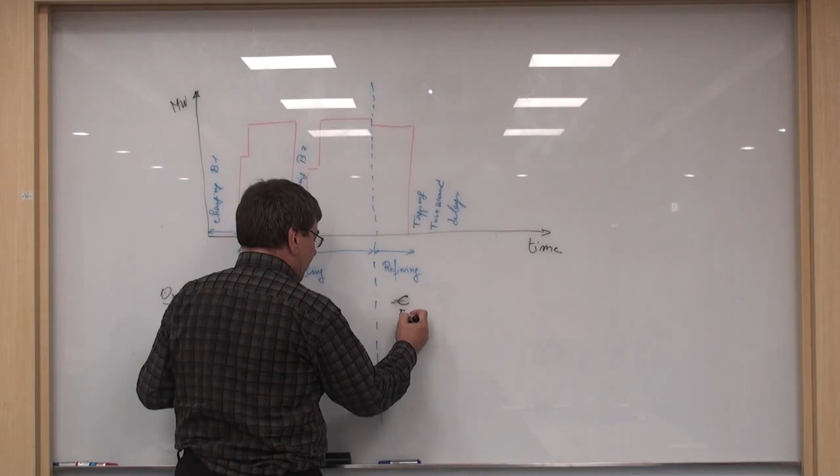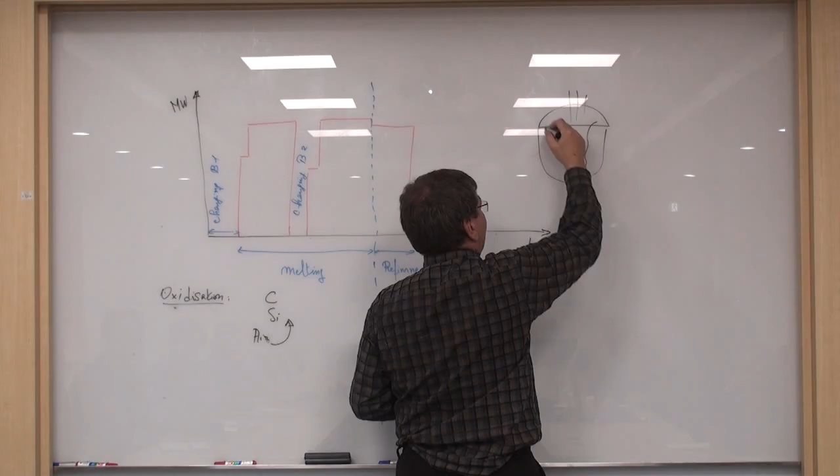The air here is considered to participate to the oxidization. Here, no air. It's easy to understand. During melting, you have scrap here around, so the air getting inside the furnace is participating to the oxidization, because the air meets the scrap.

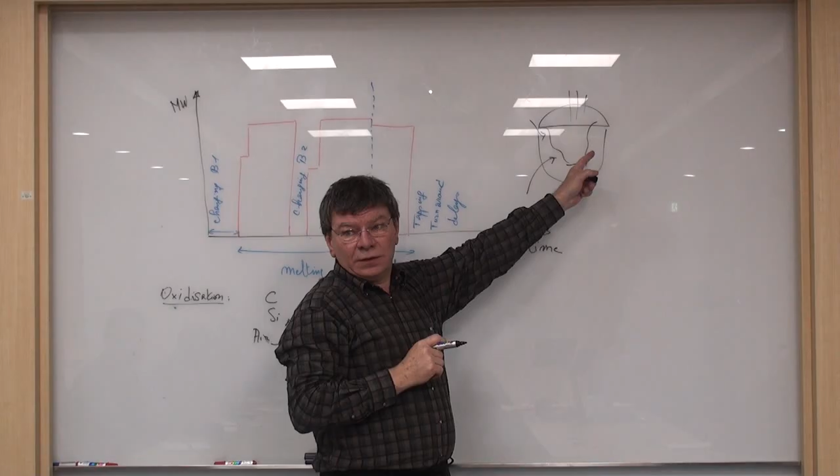During refining, the air, of course, is getting in, but just meets the CO, which is coming from the bath and making a reaction here inside. There is no participation of the air to the thermal balance of the steel. Except if you have too much air, and then you can cool down the bath. But this hypothesis I don't consider here in the thermal balance.

I'm doing this not to make a diagnostic of a furnace, but to design the best conditions for the furnace. Okay? So we do not consider the air intake during the refining time, and it is for the thermal balance, not for the off-gas. For the off-gas, it's considered to have the off-gas analysis and flow here.

So if we suck the gases from the EAF, and if we take out so much of the introduced gases from the EAF, then the atmosphere air is coming. Yeah? No?

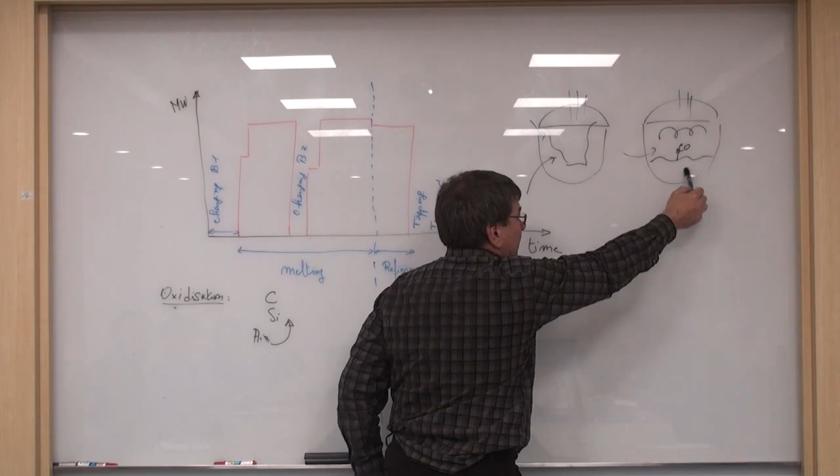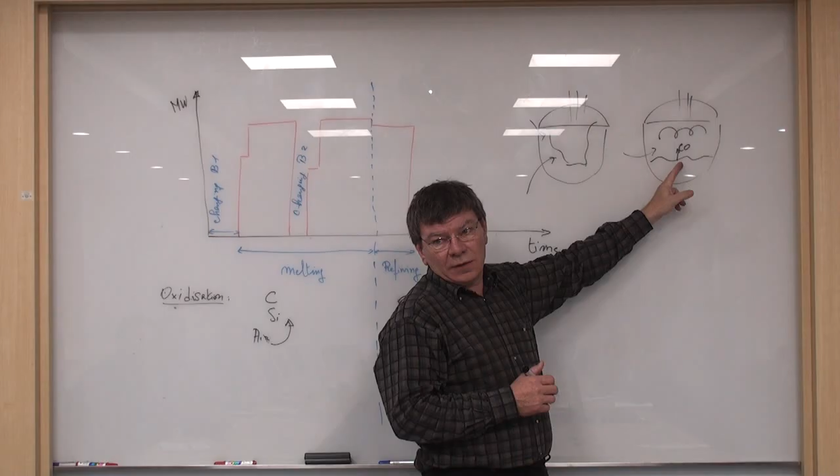Yeah, because the air will not participate directly, this is my hypothesis, to the decarburization. To a certain extent, it is wrong. Because if you increase the partial pressure of oxygen in the furnace atmosphere, of course it will contribute to the slag equilibrium. But for me, it's a very, very thin influence, which is not very important for the purpose of this kind of calculation.

How about the stainless? In case of stainless steel, the stainless steel EAF has bottom stirring. Not necessarily. No. Normally the EAF for stainless steel has porous plugs, 3 or 4 and so on. And when they do the bottom stirring during the refining times, they can meet atmosphere air. So you also do not consider it, because it's a small item and it's not easy to adapt?

This is a very special application. I just know Japan is using intense stirring for stainless steel. In Europe it's not used? No. And neither in the US. I made trials myself in a stainless steel furnace with porous plugs. And the result is that you increase the Cr2O3 of the slag.

Sure, too. You increase the chromium oxide in the slag. Yeah. And that's it. Okay. Especially during the flat bath. Yeah, because you increase the contact between the steel and the atmosphere. This is not useful, because there is no way to avoid having, let's say, air in the furnace atmosphere. Otherwise it takes measures to tighten the furnace so that you cannot work anymore.

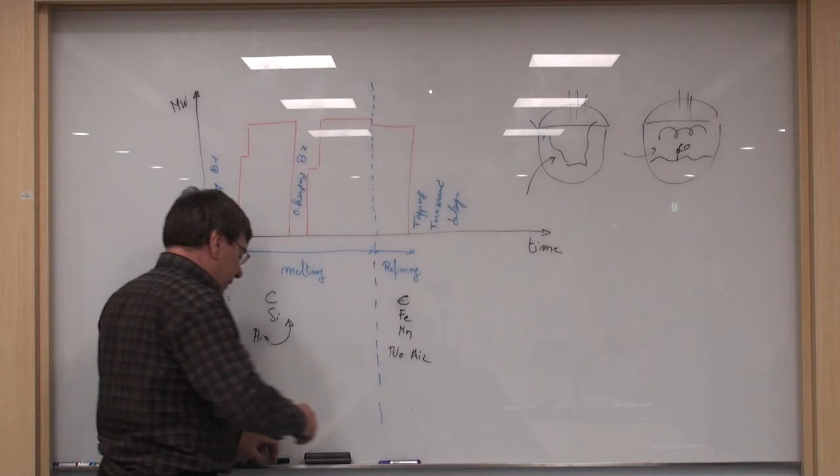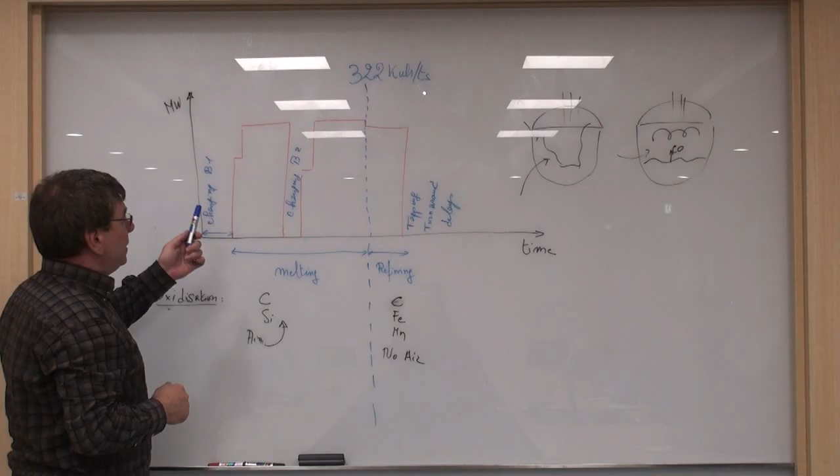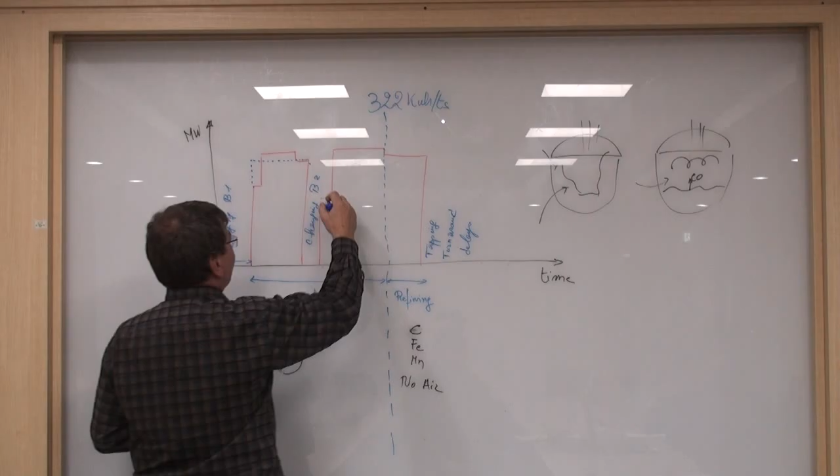Then the criteria here is 322 kilowatt-hours per ton of steel. For sure, in reality you may have a different melting pattern. For example, you reduce the voltage at the end of the melting phase of basket number 1. Here you have this kind of melting profile. In fact, the megawatts you see in my model is an average megawatt. Okay.

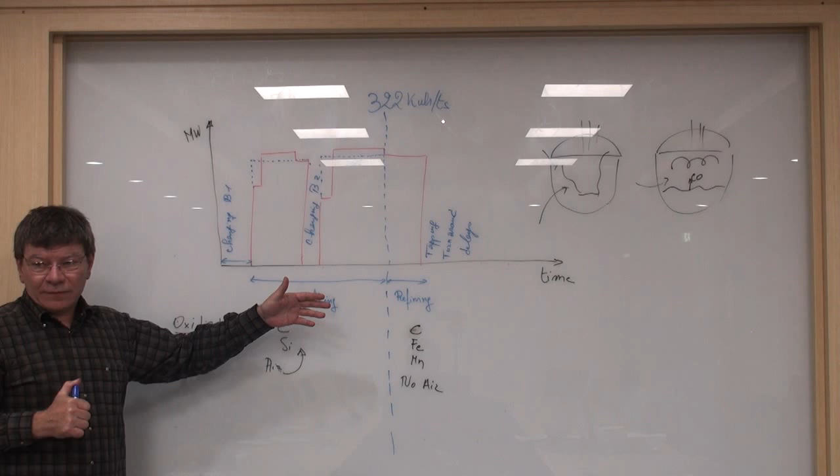Again, let's say we could implement this in the thermal model, but it complicates the model unnecessarily. For the furnace transformer, you just need to increase the capacity of the transformer by 10%, and that's it. Or 15%. Well, so maybe we can reconsider the carbon balance as well if you think it's necessary.

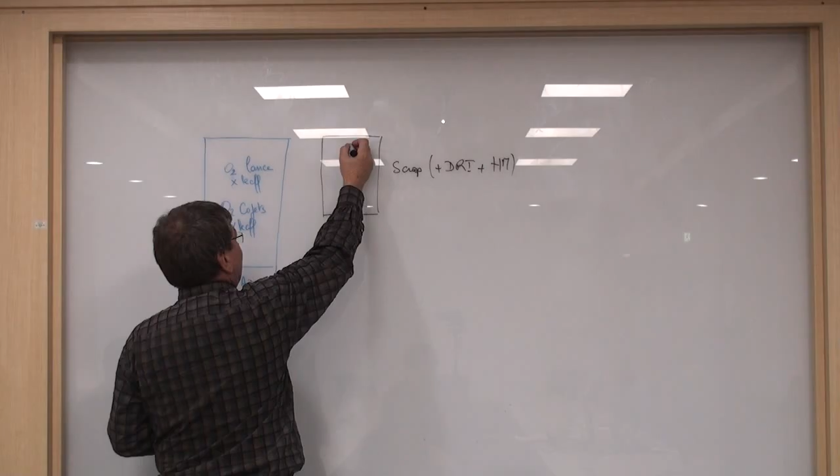On the other hand, I have what I have available in scrap. This is scrap plus DRI plus hot metal, but generally speaking, scrap. Inside the scrap, we have carbon, silicon, manganese, phosphorus to oxidize. This is given by the material balance. And then I have to inject carbon. This is given by the refining time and the flow rate I want to use in the furnace.

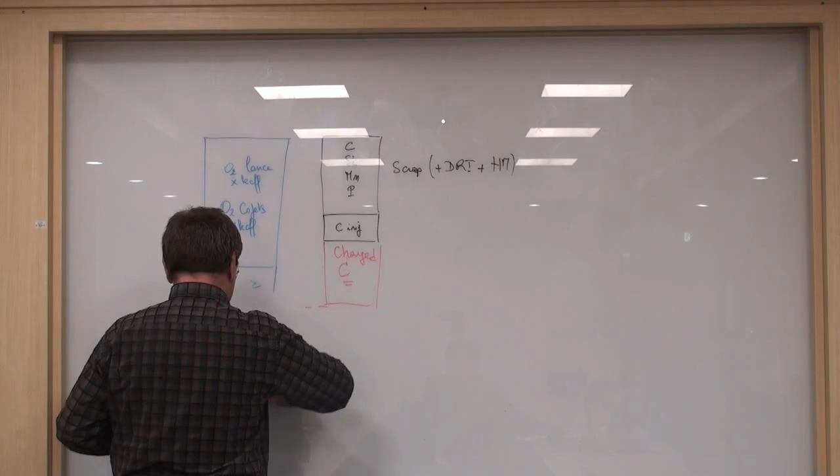And then comes here the calculated carbon, charged carbon, which is to compensate the total amount of oxygen. Is it clear to you? Yeah. Yes. So easy, yeah? It was more complicated in the formula, but this is just a translation of that. Okay. You have the picture. Other questions? No? Perfect.

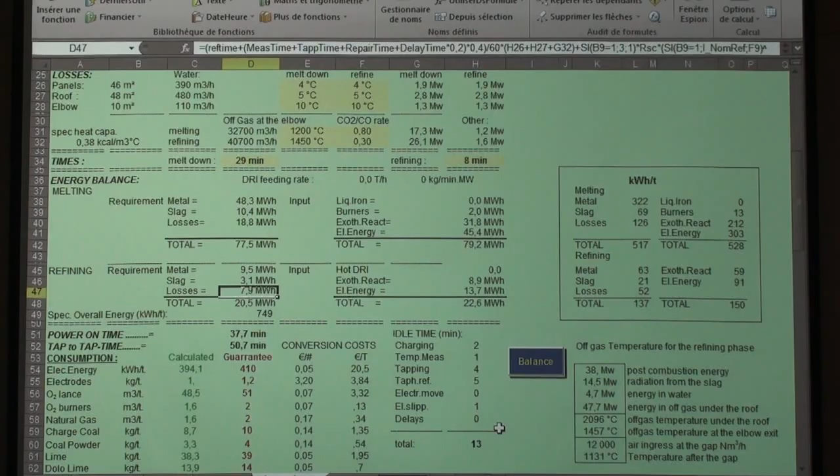Well, so if we come back again, when you have a project, the first thing is to know the tap weight. So you fill in the tap weight and the hot heel. For a conventional furnace, hot heel is about 10%. Some other companies said 15%. Too high? Look, there were so many studies about how much hot heel you have to keep in the furnace. What is sure is that if you increase the hot heel, you slow down the furnace.

The hot heel is necessary to have an aggressive power profile. Because if you don't have hot heel, for example, you bore down and, as the electrodes are in the scrap and the roof is protected, you go full power. But then you go down to the bottom, and if there is no hot heel on the bottom, you dig out the refractory. So the hot heel is there to maintain a certain buffer to absorb the energy of the high power furnace.

If you extend the hot heel too much, of course you extend the surface, so you increase the radiation of the hot heel during tapping, and then you have to put more energy in to reheat the hot heel. But as I heard, if we increase the molten steel, we can save electric energy because the hot heel can help melt the scrap. And make only the bed. Yeah? Hot heel is necessary, definitely, but not too much.

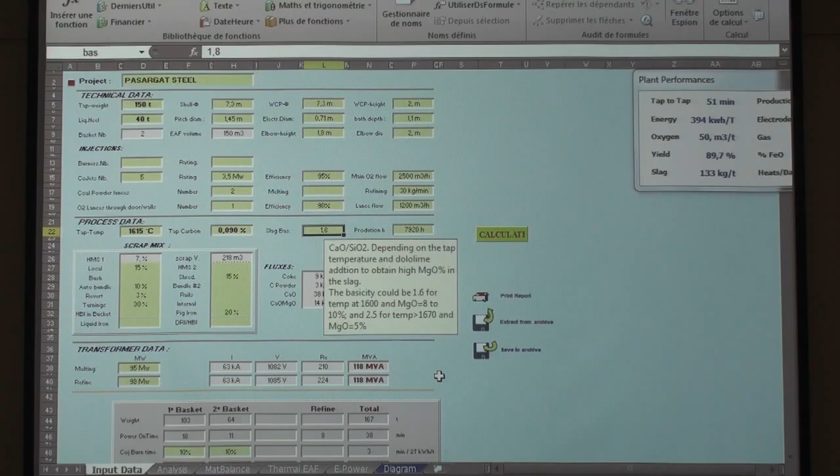You have this small comment. The slag basicity can be reduced for carbon steel, I mean construction steel, down to 1.6 if you are sure to tap below 1,600 and to have saturation of magnesia from 8 to 10% of the slag. And if you want to increase the tapping temperature for special applications, for example 1670, then you have to increase to 2.5, and MgO minimum 5%. The saturation in this case is in the range of 11.

For conventional furnaces, you are not sure about the homogeneity of the bath, so you have to increase the temperature a bit, because the temperature you measure in the door is not necessarily the same everywhere. And then afterward, it depends on the preheating of the ladle itself and the distance between the furnace and the ladle furnace.

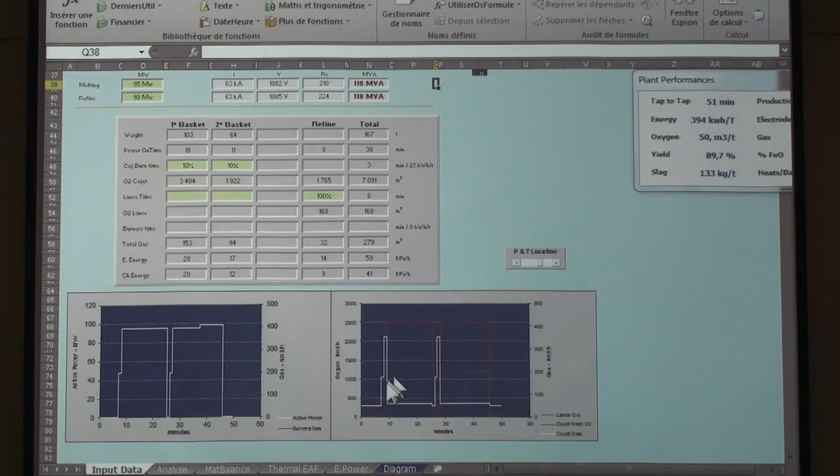Then you fix the... I will put you again this macro for the megawatt calculation. Yeah, and then you put the process you want here. For the burner time, I mean, it's not necessary. This is the time where the injectors are used as burners. So it's not necessarily a long time, because then the efficiency of the burner is decreasing very quickly. So you can switch to the oxygen injection quite fast.

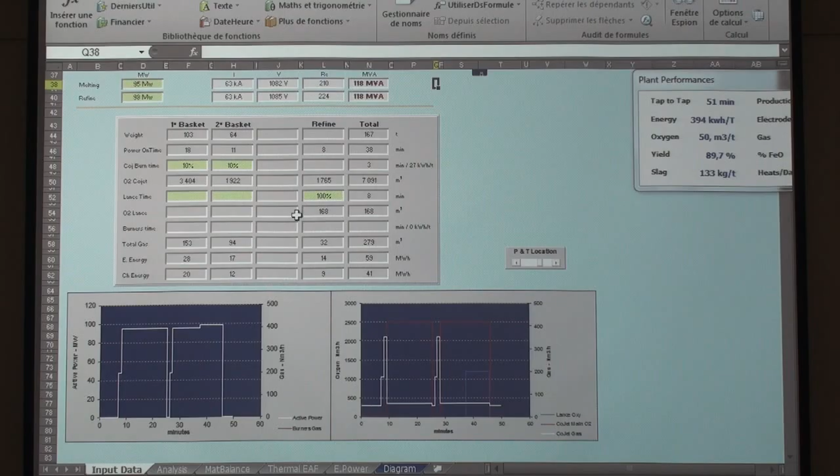And the door lance, I don't suggest to use it for melting phase, just for refining phase, because it's better to keep the door closed as long as possible to avoid too much air ingress. So this fixes the process profile.

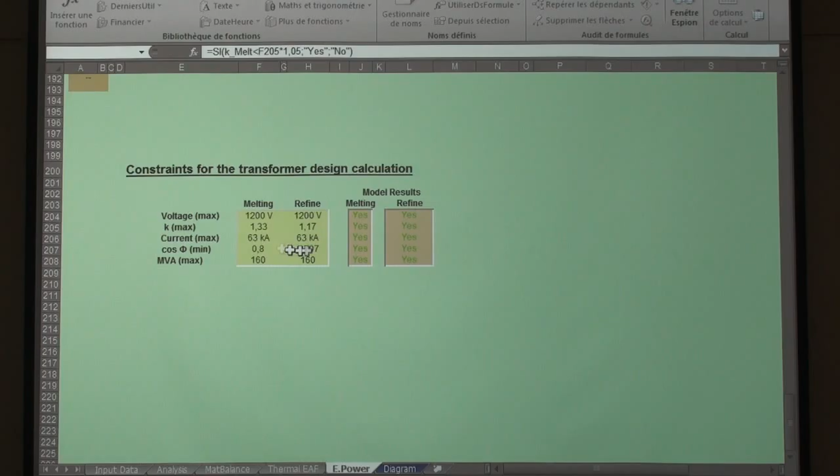Then you go to electrical power, you fill in the single line diagram, and then you adjust the MVA and the secondary voltage. You can adjust as well the current you need by this limitation here. This you don't need to touch. This you don't need to touch. This you don't need to touch, but the current we can adjust depending on what you need.

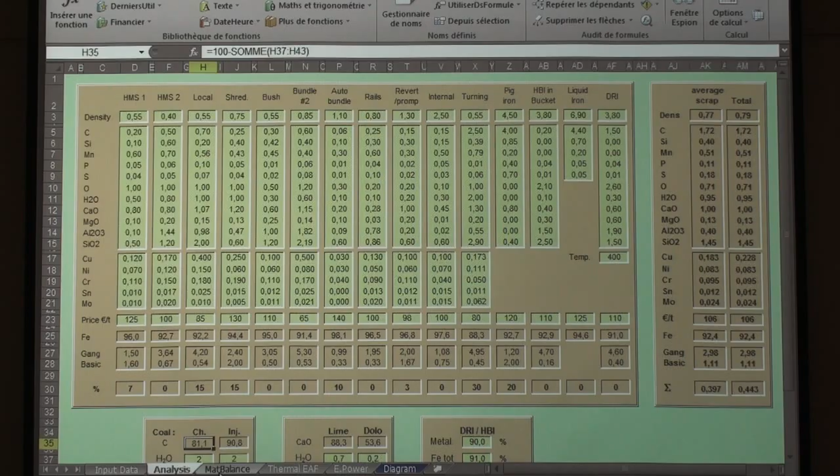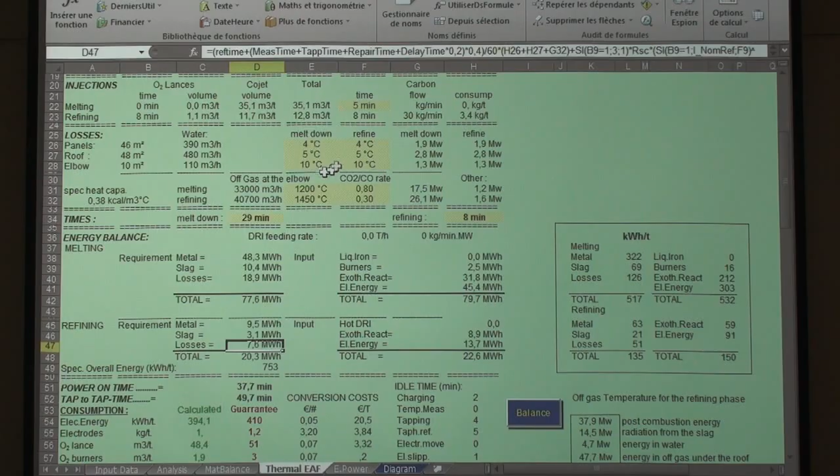Then you go to analysis. You adapt the analysis of the fluxes whenever it's necessary. Eventually, you adapt the scrap analysis depending on the situation. You check the material balance. You adjust the iron content and the magnesia you need. And then thermal balance. You adjust the water delta T and off-gas temperature. You balance and you check here; this is the Sankey diagram.

Yeah, where you have the liquid steel enthalpy, the energy of the slag. This is the energy absorbed by the water, I mean the water in the scrap. I've put this here, but it could be included in the off-gas itself. This is the water-cooled panels. So the slag usually is in the range of 60 to 80 kilowatt hours per ton.

Slag 60 to 80. Yeah, depending on the scrap cleanliness. Water-cooled panels, it's in a range of 35 to 40 for good furnaces. 35, 40. This is the water-cooled panels here.

Off-gas is in a range of 120 to 150 kilowatt hours per ton, depending on how much fossil energy you put, because fossil energy will create a lot of CO. So if you have a lot of CO, you increase the off-gas energy. FeO, this is eventually the reduction energy for the DRI. So it depends on the DRI.

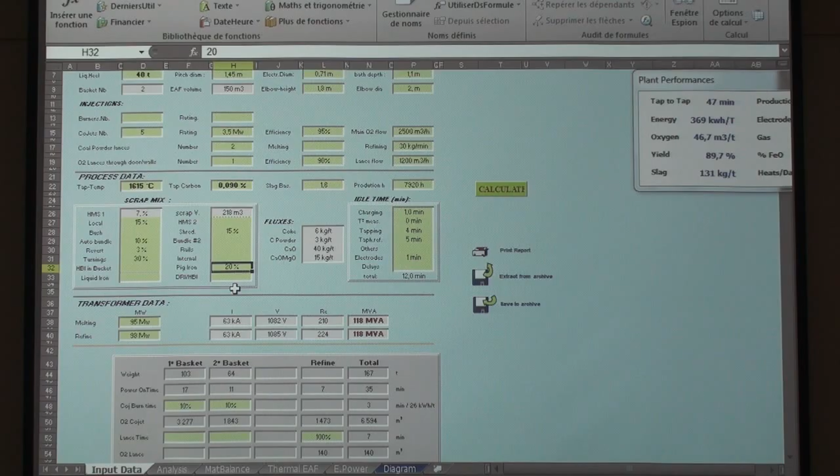And this is the ohm losses. Electric ohm losses, yeah? You remember the resistance in short circuit, times current squared, and so on. So this is the requirement of energy, this is the sources of energy. So liquid iron, if you put liquid iron, you will see that you have a figure here. I can put liquid iron. You see? This is the enthalpy of the liquid iron.

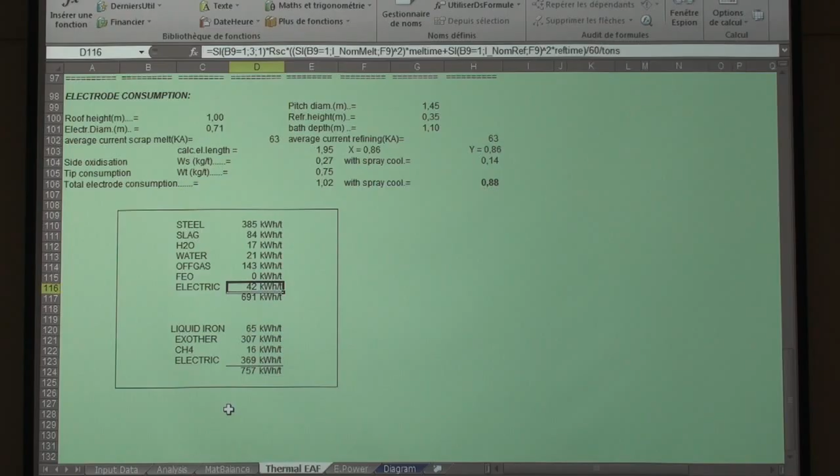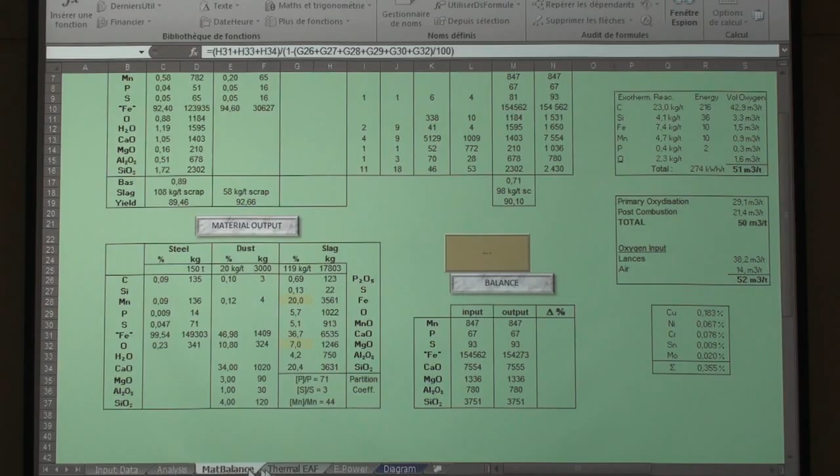Exothermic energy, it's coming from this value, approximately. This is the methane burned by the burners, and this is the electrical energy. I have not balanced here. So there is a small discrepancy because we need better balances. Okay. So this small table is giving you a diagnostic whether your thermal balance is okay or not. Yeah?

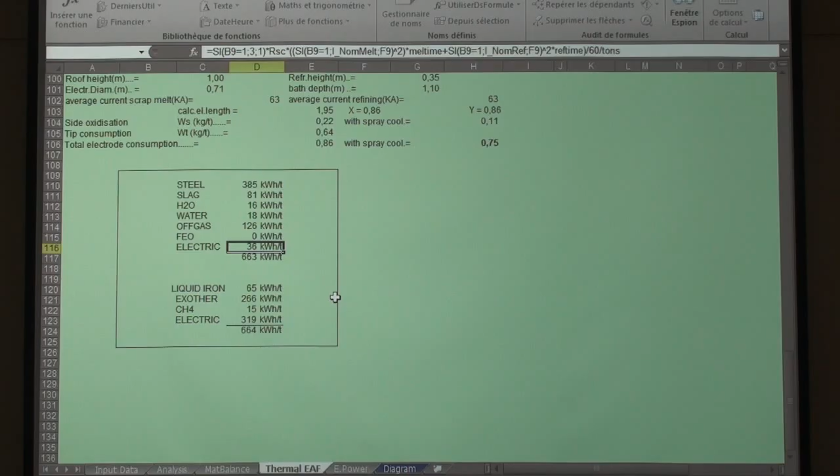Okay, now you have the process diagram. Usually I had a button here to select the parameter I want to display, and it was automatically done, but it's not working anymore since the 2007 version. They have changed totally the language there, and I didn't spend time enough to redo this stuff. But it's open, huh?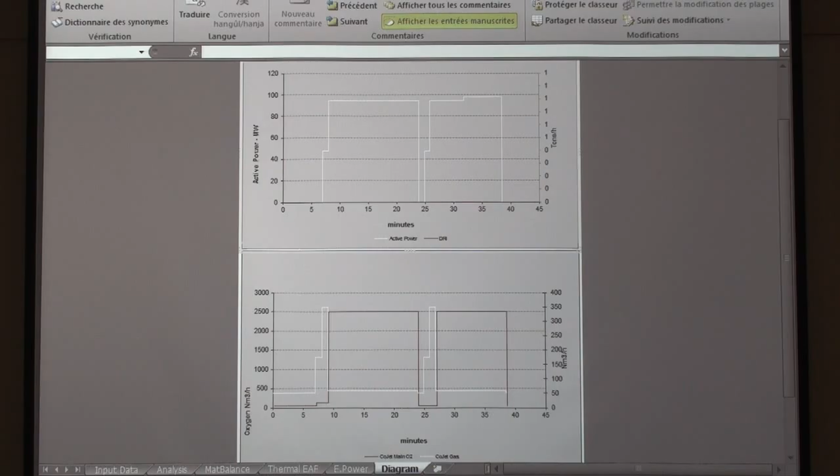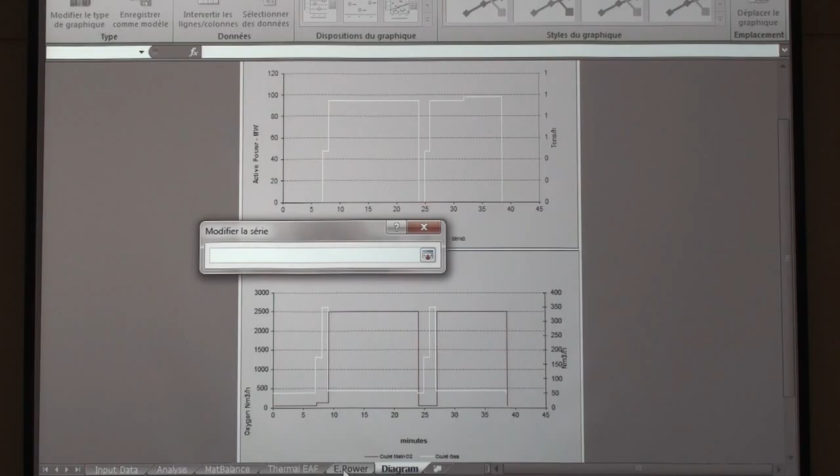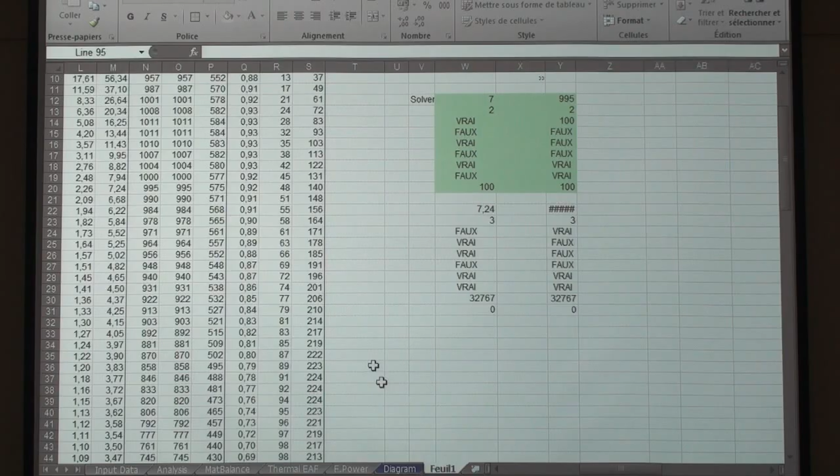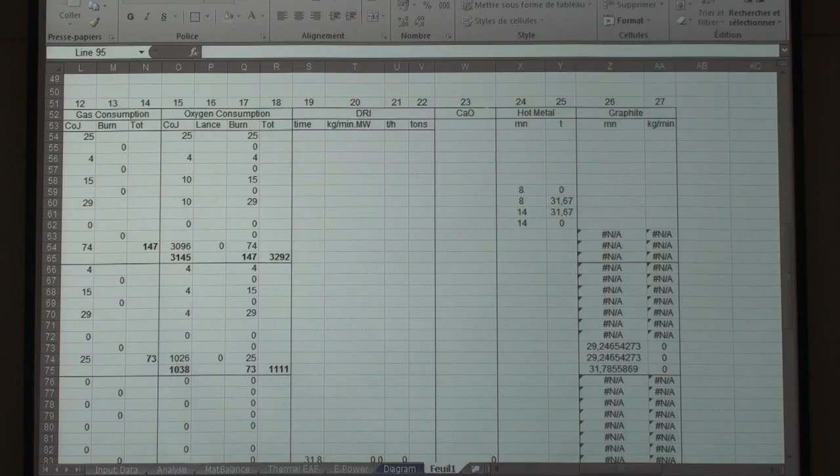So you can go and put additional parameters inside. It's not long. You put add here and then you select, but this is on the sheet. In fact, I have a hidden sheet with all the process schedule here. So if you want to add stuff like that, you can select here, knowing that the time...

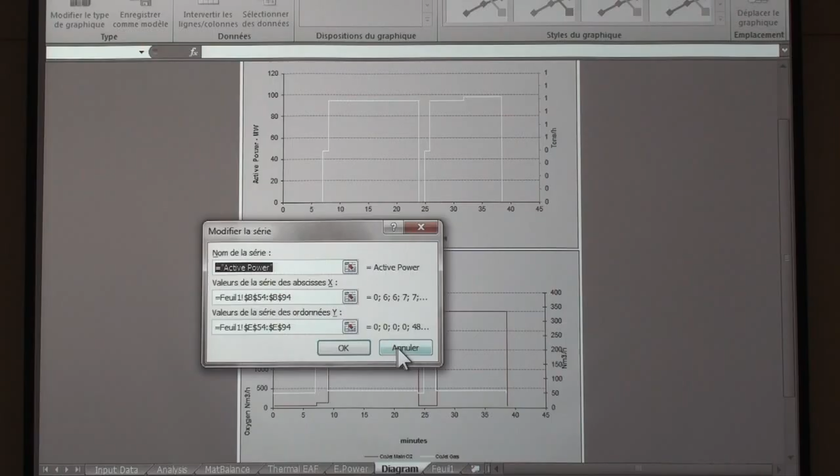You see, the time is given by the column B. Column B is here. This is just time calculation. Well, you can select B or C. And then select this one here, and then whatever parameter you need hereafter. Copy and paste. Okay? What else do we have?

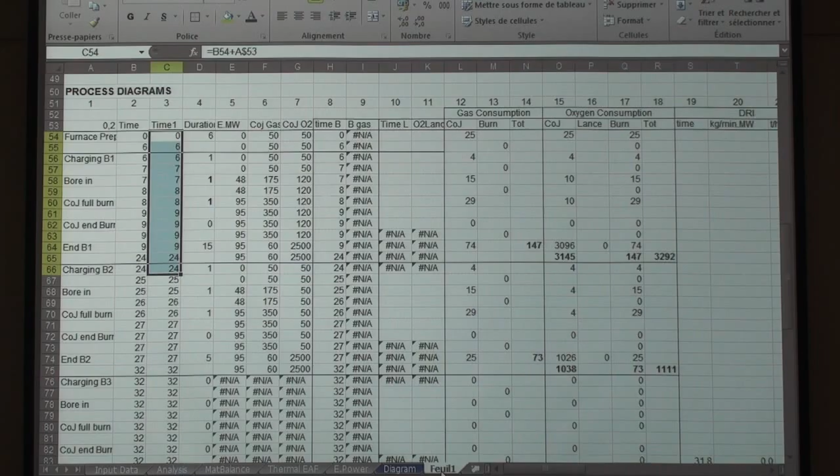We have another hidden sheet, which is, let's say, the report. Yeah, this is for the salespeople. I have summarized the main items here. Of course, this is not to give the customer, because the transformer is the result of my simplified calculation. This should be the base for, let's say, the transformer reactor design.

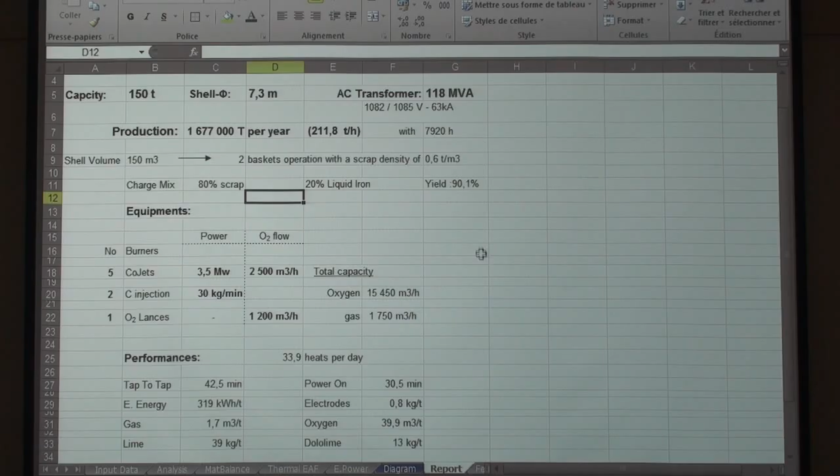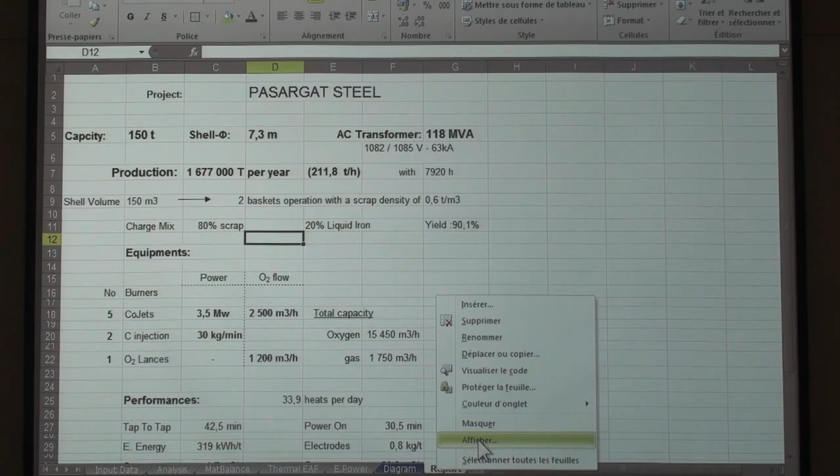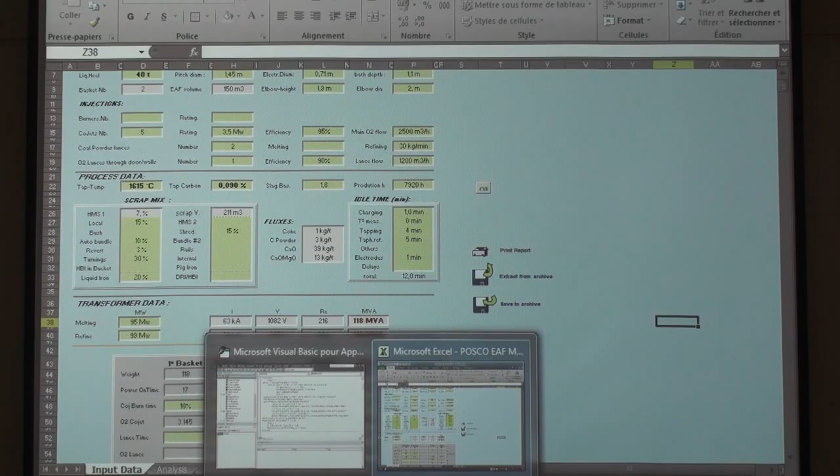What may be missing is the megawatts I need. And you don't need to display this, because it's coming automatically when you click here. Yeah, and you get a PDF immediately. So this is it for this model. I let you digest, and we go.